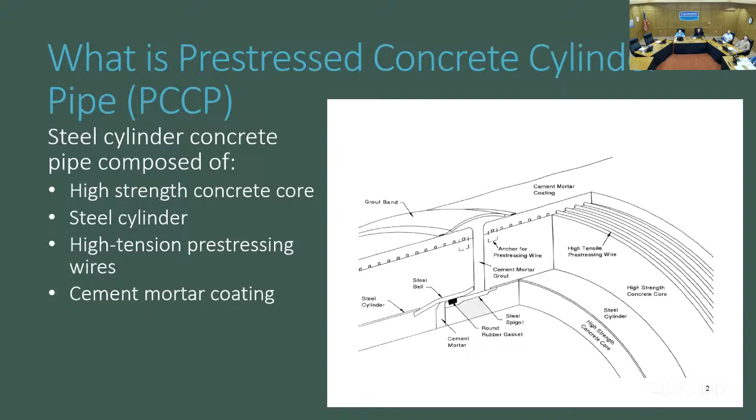So why do we do a condition assessment? Well, PCCP, unfortunately, is susceptible to catastrophic failures. The pre-stressing wires tend to corrode and fail, and one contributor to that is hydrogen embrittlement of the wires, which is a common cause of failure in PCCP. So performing condition assessment helps us identify pipe sections with potential structural deficiencies, and allows us to track and plan for rehab of pipelines that may become structurally deficient.

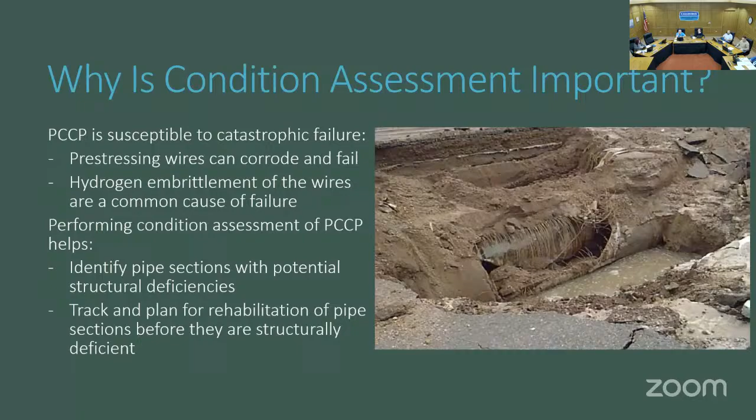Sorry, skipped over — we unfortunately suffered a big event years ago where we had a catastrophic failure of one of our PCCP pipelines. This is a video from March 30th, 1997 that I'd like to play for you all.

Simi Valley residents are back in their homes now after a ruptured water main forced them to evacuate, but repair crews continue to work around the clock to repair the damage. That's Madera and Royal River, yeah, from my house. In Simi Valley, it was just before 5 o'clock Saturday when a water main burst, forcing a flood of water to pour into the street. My wife heard it — she said it sounded like a pop, like a loud light bulb going off. And she heard screaming from across the street. Across the street is a shopping center, which was filled with people at the time the pipe burst. Suddenly they were cut off by water gushing out at 20,000 gallons per minute. A half-mile stretch of Madera Road was quickly flooded, and with the water rapidly rising, nearby residents were told to evacuate.

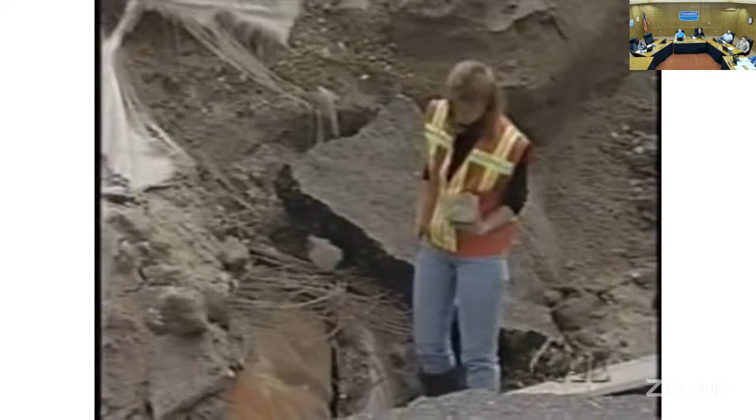Raging torrent. It was like raging. Crews have been working nonstop to repair the damage. Now that the water has receded, you can get an idea of the immense force the water carried. Huge chunks of asphalt were ripped from the street and thrown to the sidewalk.

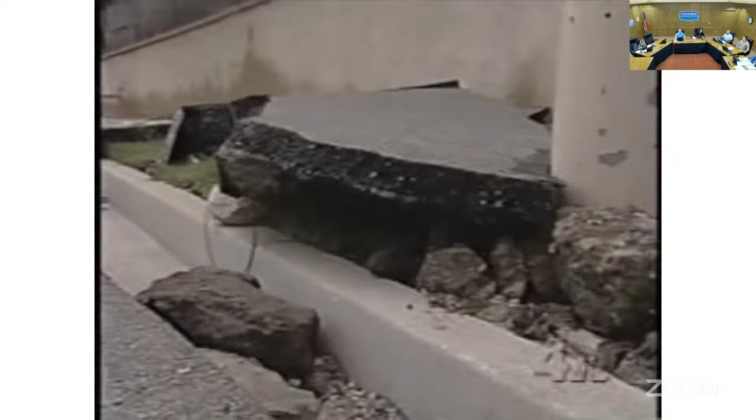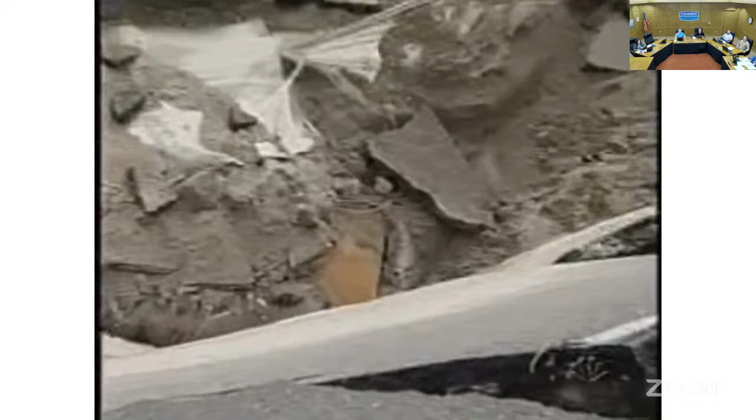The problem started a few days ago when a contractor working on the nearby Wood Ranch development cracked the water main. The valve under Madera Road was closed for repairs. A power outage on Saturday created a giant pressure surge. When the water hit that closed valve, it couldn't contain the pressure.

Some of that last part isn't entirely accurate, but that's okay. That video did show the pre-stressing wires, the steel can, and a lot of concrete just everywhere. Unfortunately, PCCP tends to fail catastrophically, very different from the typical failure modes of welded steel pipe. That's why we like welded steel pipe much more.

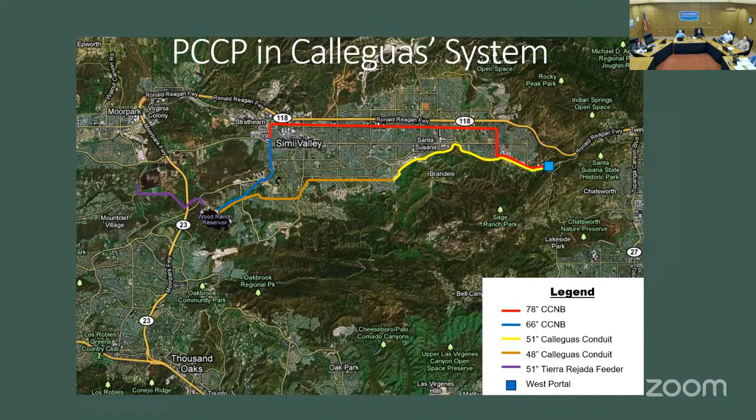This next slide shows the amount of our system that's composed of PCCP. The lines shown in red and blue represent the Calleguas Conduit North Branch, and the lines in yellow and orange are our South Branch, 51-inch diameter, and our North Branch is 78 to 66-inch diameter. There's also a purple line representing the Tierra Rejada feeder, and collectively that is a total of 26 miles of pipeline in our system.

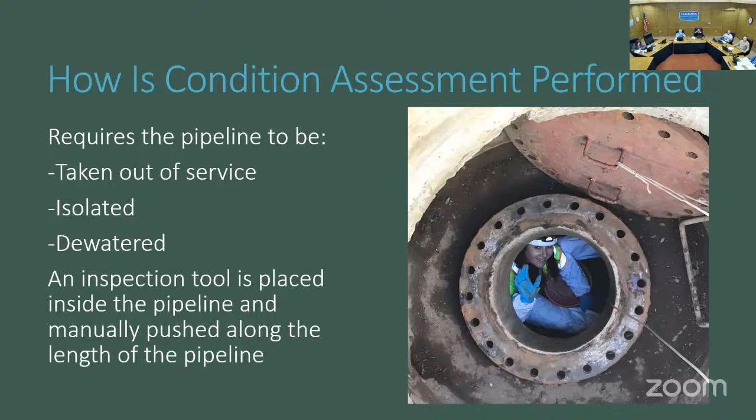And we insert the inspection tool that does the inspection, looking for wire breaks specifically. Here's a photo showing that instrument. It's evolved over the years. Basically, this tool produces an electric field that creates an electric current in the pre-stressing wire. The second coil detects the electric field produced by the wires, and a break in the wire creates a disruption. That's how we know there's a break, because we identify and detect that interruption in the field.

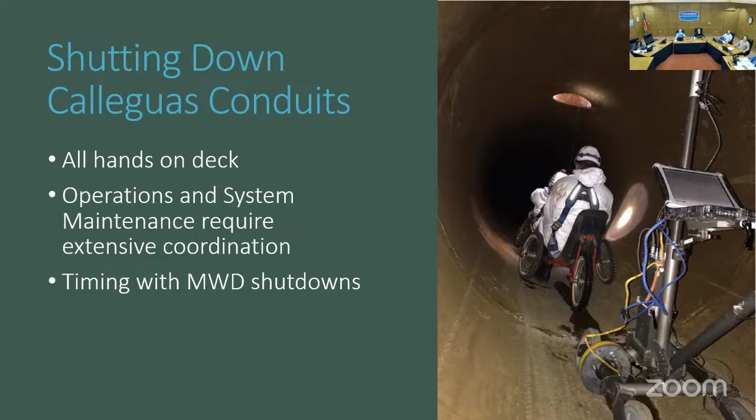So shutting down Calleguas Conduit, let's talk about what happens actually during that inspection. Of course, it requires all hands on deck. O&M engineering is certainly involved in this. Our operations and system maintenance requires extensive coordination ahead of the shutdown and the entry into the pipeline. We also coordinate very closely with Metropolitan Water District's shutdowns, so we can take advantage of that period when we're not going to get imported water supplies into our system.

And with that, I'll hand it over to Julio. Thanks, for the next steps.

Before I get started, about two weeks ago, Ian sent an email to all the supervisors with a list of bulleted item questions. One of them was, what keeps you and your staff awake at night? And I think I can say now, line breaks keep me awake at night.

So let's talk about how the operations division prepares for Lake Bard Water Filtration Plant and Las Posas wellfield production. Where's page down? Oh, here it is. Thank you. Okay, okay.

So we're going to start with Lake Bard Water Filtration Plant. We have to go all the way to the source, which is Lake Bard. At the source, we need to determine what the water quality is. I've got about three or four items here that are very particular that we need to know about in the operations division to understand what would optimize performance at the treatment plant.

One of them is oxygen. We need to know whether or not the water is anoxic, which is low in oxygen, because this could cause the water to smell like hydrogen sulfide, which smells like rotten eggs. If you have a hot water heater, some of you may have opened up that drain and it has that foul smell - that's hydrogen sulfide, the rotten egg smell, which is obviously undesirable.

Other things that we look at are elevated algae concentrations. We need to determine whether or not the amount of algae that occurs naturally in the lake is elevated. If it's elevated, it's going to affect the filter performance because the algae sits at the surface of the filters, and the filters are designed for particulate matter to penetrate into the filter bed.

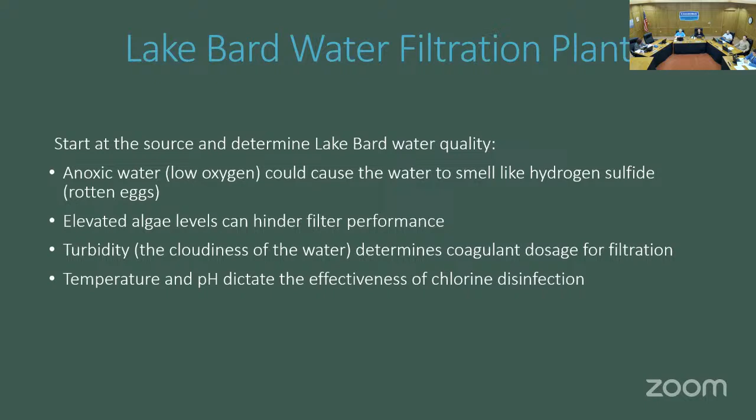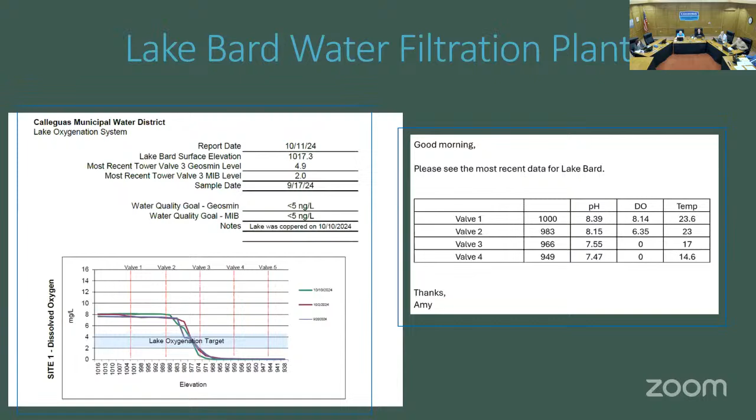So this is a total indication that the lake is thermally stratified, and we have the ability to draw from those valves. That information is very helpful to let us know that where the valves have 0 oxygen, it could be a challenge to treat that water. On the right-hand side, we have valves 1, 2, 3, and 4, and a table here - let's jump to dissolved oxygen. You can see at the higher levels, valve 1 is at 8.14, valve 2 is at 6.35, but it drops dramatically at valves 3 and 4. This is very good information to help us understand the water quality at the lake before we start the Lake Bard water filtration plant.

Once we understand the water quality at Lake Bard, we put the Lake Bard water filtration plant in recirculation mode. Lake water is recirculated through the filtration plant and back to Lake Bard to displace any water that's been sitting within the treatment plant system. During recirculation mode, ancillary equipment is exercised and tested to ensure it's reliable during production.

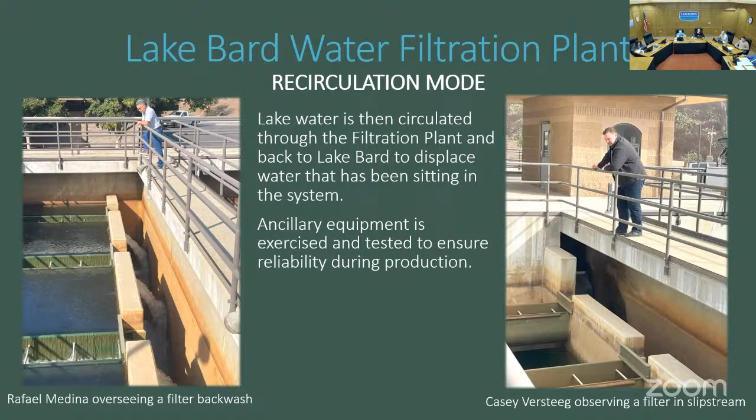To the left is one of our operators, Rafael Medina, overseeing a filter backwash. You can notice the water flowing out of the green troughs and into the gullet - this is when we're washing it, and the flow basically travels backwards. On the right is Casey Versteeg, overseeing a filter in slipstream mode, which is just another term for bypass. The slipstream mode is the mode we're using when we're in recirculation mode.

Operations could not do this alone - we most definitely need support from the other O&M groups. Juan Zavalza is with the distribution system group, and he's replacing a diaphragm on a solenoid valve. This solenoid valve receives cooling water, which is injected into the sludge pump. To the right we have Patrick Augusta, working on a positive displacement pump for one of our filter aid systems. The filter aid chemical helps improve the coagulant dose, so that's really important.

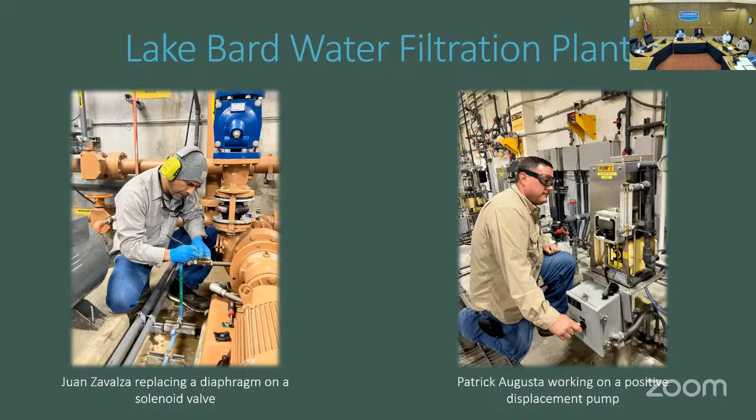After chemical doses have been adjusted, filters backwashed and preconditioned and performance tested, and plant performance is all dialed in, treated water is redirected from recirculation mode into the clear wells and then into the distribution system. Off to the right we have two operators, Eddie Russell and David Hernandez, opening up those clear well valves and preparing for a backwash supply. The clear well is right on the other side of Eddie Russell. The water flow during backwash is from the clear wells through these valves, which are isolated closed - they're going to open them up to a backwash pump and into the filters.

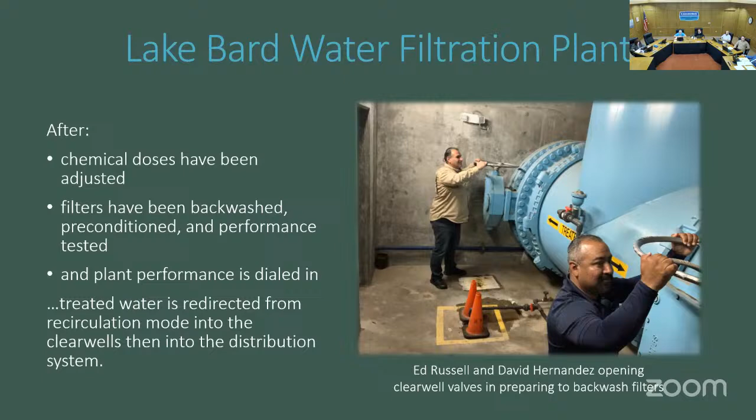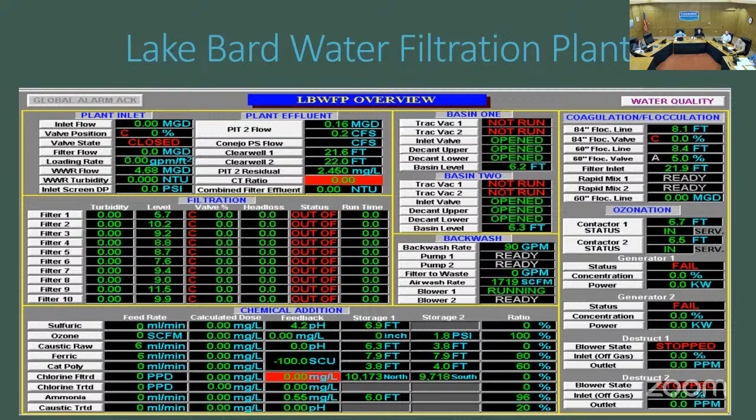Okay, on to the Las Posas well field. Water extracted from the wells at well field 1 and 2 can be high in iron and manganese. Therefore, pre-injected MWD water pushes a plume of higher-quality water that reduces the amount of iron and manganese that can be oxidized by chlorine and precipitate into the water, causing undesirable color during extraction. Also, injection helps reduce the chlorine demand during disinfection.

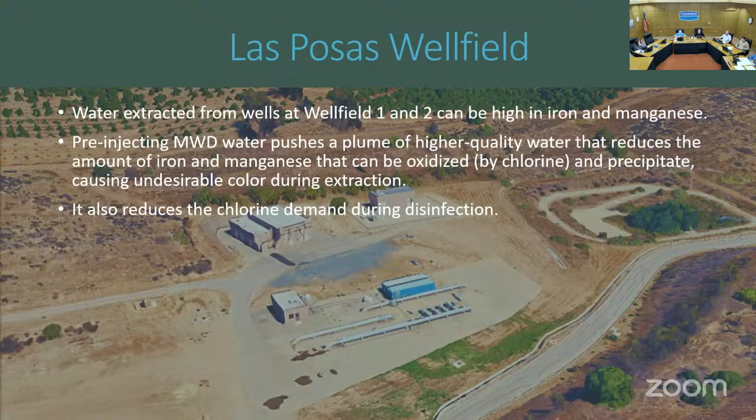So we need to make sure that we bank enough MWD water into the ground to last for the duration of the outage. Something we need to be considerate of is that most wells, when injecting, only inject at a rate of 1.5 CFS cubic feet per second, yet during extraction they produce at a rate of 3 CFS. So it takes longer to inject water at the same quantity than it takes to turn around and extract it. The longer we extract, the likelier the iron and manganese concentrations are to increase. That's why it's really important in operations to make sure we bank enough water before we turn around and extract it.

This is Jose Tamayo. He's configuring the local control panel on well 7 for flush. And here he is again to the right, taking a look into the air gap, just checking the color.

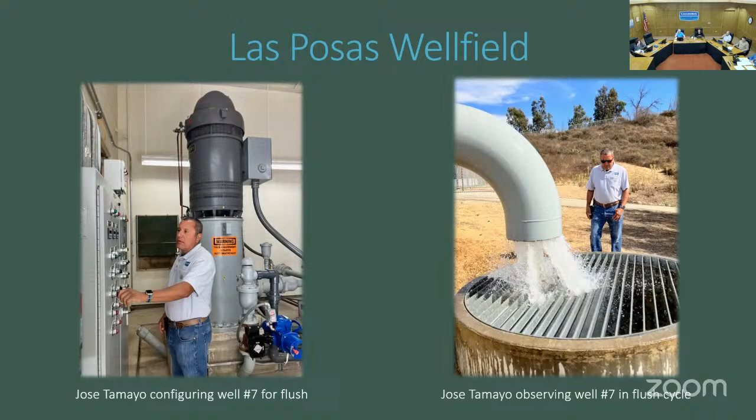And that's it. I'm going to hand it off to Matt.

All right, with that, pipeline entries keep me up at night. You'll see why. So for system maintenance purposes, and particularly for this pipeline entry coming up next year, we do confined space training at a rescue facility at wellfield number 1 before all shutdowns. That's the picture to the left. To the right, that's Pepe Cervantes actually entering the 78-inch pipe, the last time we did this pipeline inspection.

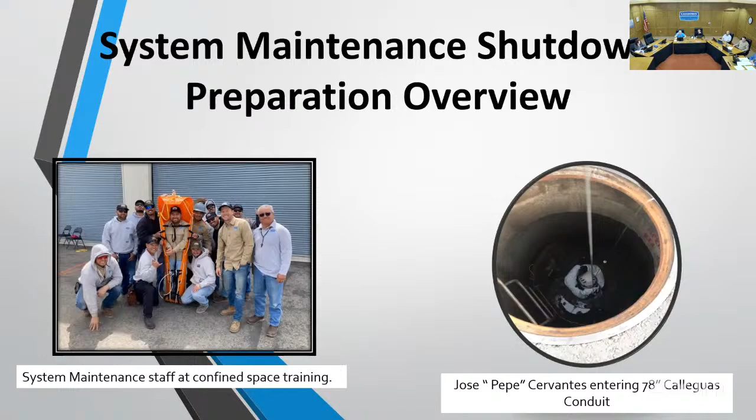As you can see to the right, North Branch Unit 1 starts at West Portal and then goes to Donkey Hill, which is Yosemite and Catherine. So that would be from one line valve to another. Doesn't look like it, but that's about 2.3 miles worth of 78-inch pipeline.

Donkey Hill is an important geographic place name in Calleguas, but it has no official standing elsewhere. Apparently someone once saw a donkey on the hill, and it's therefore been known since as Donkey Hill. It's a big landmark for us, but if you tell your friends you're going to Donkey Hill, they'll have no idea what you're talking about. We could ask the city to make that official. We certainly could, that'd be great. You know how excited people would be here. It's super hard to explain to the new guys why we call it Donkey Hill.

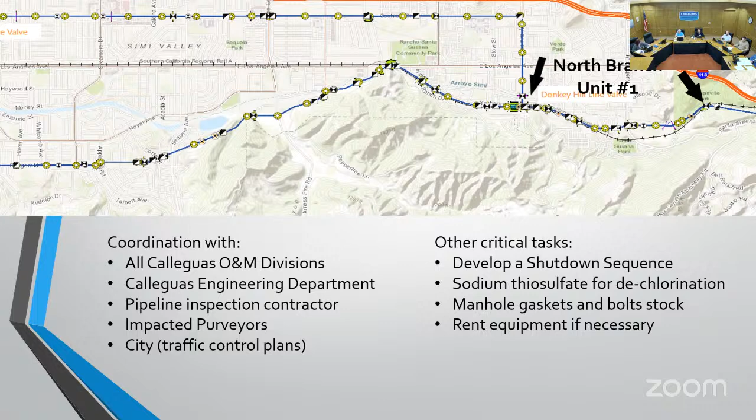Our preparation for this particular shutdown will be about 4 months. We coordinate with all Calleguas O&M divisions, engineering department, pipeline inspection contractor. We touch base with the impacted purveyors, and we have to submit traffic control to the cities. Some other critical tasks include developing a shutdown sequence, checking stock of sodium thiosulfate which is used for dechlorination purposes, checking all manhole gaskets and bolt stock because we switch those out every time we take them off, and arranging rental equipment, as little as a restroom if necessary for the shutdowns.

So we start out with isolation. Isolation could be from anywhere from 2 to 5 main feeder valves. We prefer to double isolate as a safety precaution when we can. And operations, which is the Calleguas control room, must be called before we touch any isolation valve to open or close it.

The picture to the left is David Vaca. He's isolating a 24-inch interconnect valve. The middle picture is Hector Aguilera isolating the 78-inch valve near West Portal. Hector is actually standing on the 78-inch pipe in the far right picture to reach that valve. That takes about 30 to 35 minutes to close, and that's going nice and slow. And that's just one of the valves.

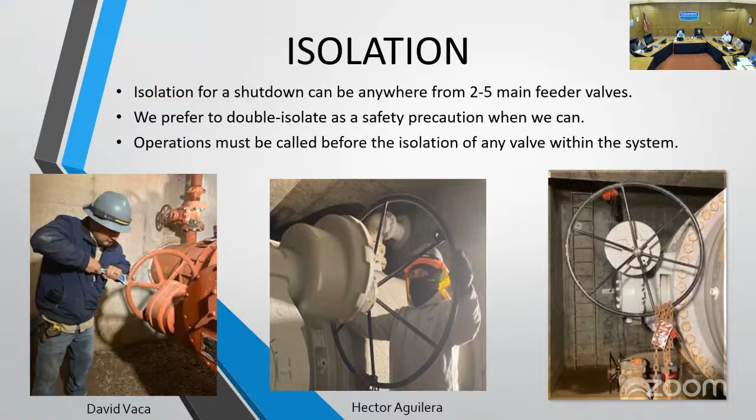Once we isolate our valves, we start the dewatering process. In the upper left-hand corner, that's an 8-inch plug valve, which we mainly use to dewater the pipelines for shutdowns. This particular shutdown, we have 4 blow-offs that we're going to be using to dewater. Total gallons for this is 3.1 million gallons, and it'll probably take us about 3 days to dewater this whole pipeline.

Certain sections are connected to storm drains, and certain sections we have to run temporary piping just to get the water away from the job site. So it could be anywhere from 40 to 60 feet of temporary piping. We try to go to V ditches, or we have to let it go down the road to the nearest storm drain. The bottom left-hand corner next to the orange bucket is sodium thiosulfate, which we set up as a drip system to dechlorinate the water.

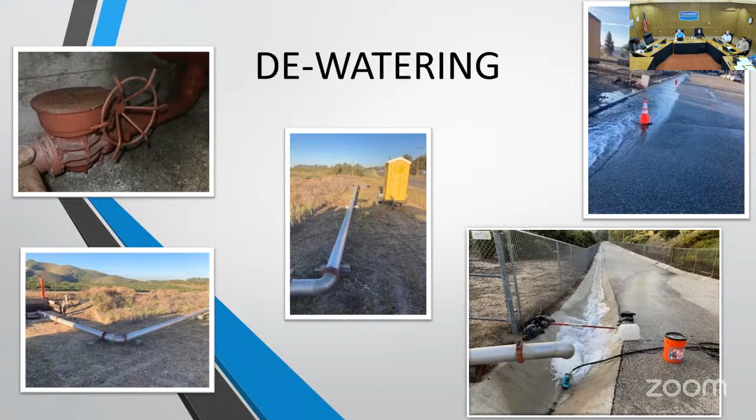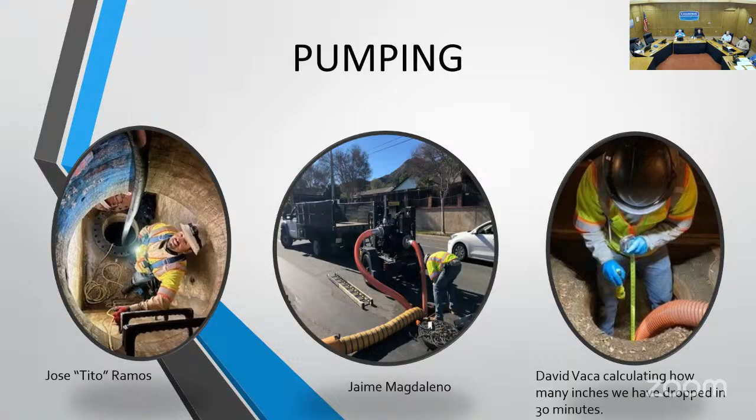We found out in previous inspections that it's always best to walk into the wind instead of exhausting and walking in, as we have contractors working above ground or even vehicles passing in Simi Valley at traffic stops where their exhaust is going straight into the fan. So they're at a stoplight, the exhaust is going into the fan, and all we're doing is pumping that in. We found it's best to always walk towards it so we can exhaust it quickly.

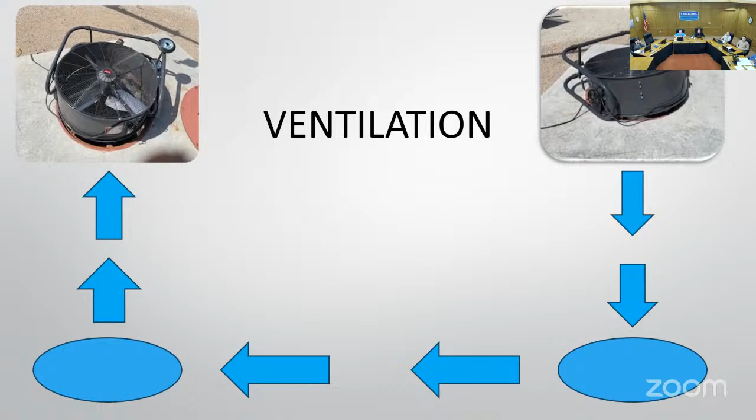Then we do a pipeline pre-inspection. As you guys know, plans aren't always perfect, so there are bellies that we can't get to from the manholes or the pump wells. During our pre-inspection, we came up to at least 2 feet of water, about 300 feet long, where we have to get the water out. The only way we can get the water out is to physically go in the pipe and drag pumps down as far as we can into that belly.

Sometimes we run 2-inch or 4-inch submersible pumps, and then we run the hoses 200 to 300 feet to the nearest manhole and extract it above grade. Those take some time, and we always run into those during each pipeline inspection—that's why we do pre-inspection.

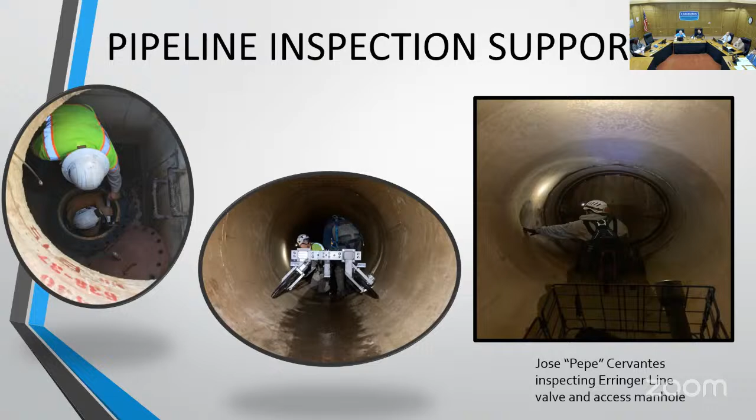The picture in the middle is Xylem setting up their equipment in the 78-inch pipe. To the right is Pepe and Jared at the Erringer line valve. Pepe is doing a visual inspection on the access manhole, and right in front of him is the Erringer line valve, which is fully pressurized on the other side. As you can see, there's no leakage on that one, so we feel comfortable just doing single isolation on that side.

So after the contractor's inspection is completed, we get to go back and work in reverse. We install all manholes, close all blow-offs, install pump well big caps, and assign staff to air and vacuum valves to monitor air while we recharge. Then we can begin recharging.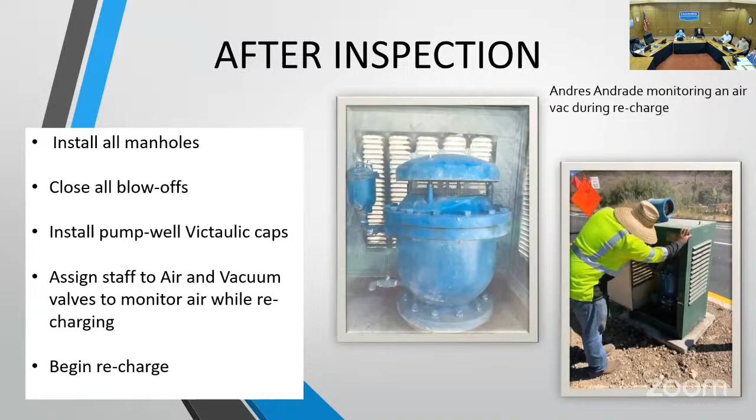We're always just putting our hand over the flow and monitoring. If it's going too drastic, we shut down the valve a little bit. Air is our friend, but air could also be our enemy.

We've got 3.1 million gallons to recharge, so it's going to take quite some time - probably about 2 days, running 24-hour shifts. We'll go day and night, running about 2,000 gallons per minute, with separate shifts running and monitoring everything to make sure we're not spilling anywhere, and that all manholes, blow-offs, and pump well caps were put back on properly.

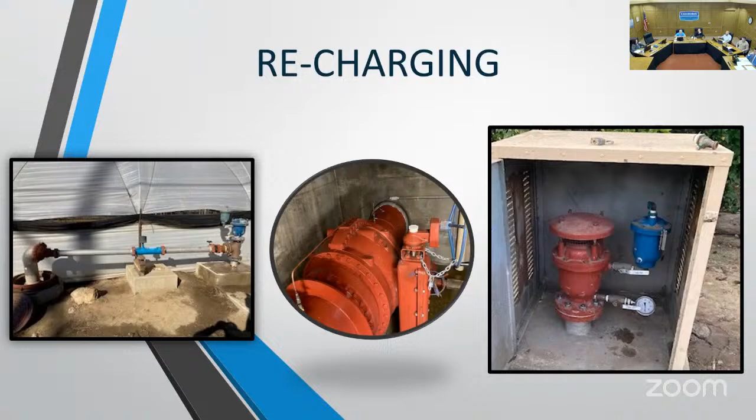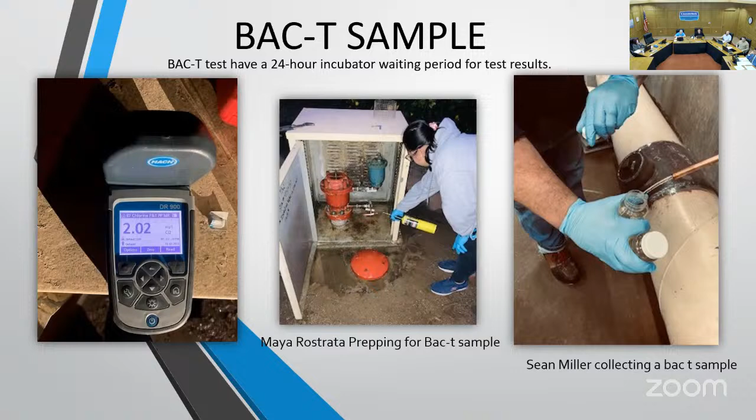After we get the line fully recharged, we flush for the bac-T, take the sample, and have to wait 24 hours until we can put the line back into service. That's a whole other day we have to wait during the process.

And that's Sean Crane saying that's a wrap - that's the final steps after the 24-hour waiting period. Operations and system maintenance staff coordinate to unisolate all valves, then resume normal operation of the distribution system, and notify all impacted purveyors so they can resume normal operation as well.

So this particular shutdown involved a 78-inch pipeline, 2.3 miles or 12,500 feet, which is roughly about 3.1 million gallons. It's 2 weeks worth of work, hopefully 1 day worth of inspection by the contractor, and we run 24 hours for recharge. We'll hand it back to you.

Do you get a lot of phone calls on the discharge evacuated? Yes, we do. We actually started labeling all our sodium thiosulfate jugs with Calleguas MWD, putting our phone number to the control room.

Once Matt's group, system maintenance, is completely done and everything's back to normal operations, and we've waited 24 hours on the bac-T, we can now transition off the Calleguas local resources - the Lake Bard Water Filtration Plant and the Las Posas well field - back onto metropolitan water deliveries.

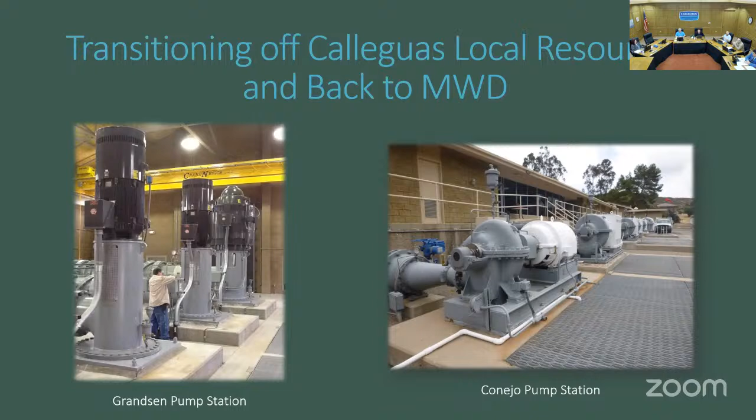The way we transition onto MWD off of the Calleguas local resources is we'll start by taking a look at pressures on the east end of the distribution system. We have two standpipes, which we call the east portal. One is connected to the north conduit and the other is connected to the south conduit. We're coordinating with Eagle Rock, which is the MWD operations center.

For example, I'll either go 20 CFS or 10 CFS increments, so they will start delivering that water to us. I'm looking for indications that we've received the water, that it's come down the tunnel and that it's at the base of the tunnel into the distribution system, using the pressure gauges on that side of the distribution system, as well as those portals. As the portal levels are going up, that's telling me that we have the water.

So then I will decrease either from the Las Posas well field or the Lake Bard Water Filtration Plant at the same increment, and I'll keep repeating that cycle until all of the local resources at Calleguas are at zero, and all of the deliveries are now coming in from MWD, which is back to normal operations.

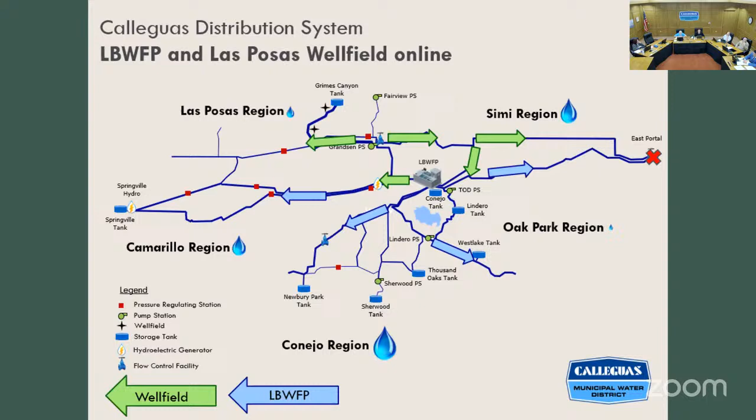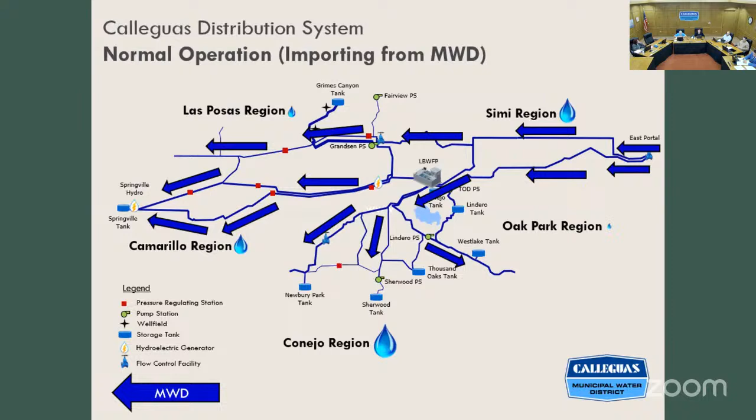So what happens after the inspection is done? There's a lot of work that goes into planning and implementing the actual inspection, and then we wait for the consultant to submit the report on their findings.

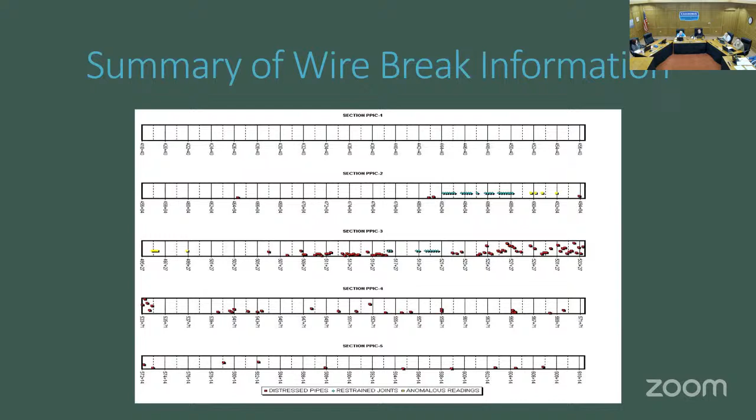This table that I'm showing is a summary of the wire break information that may be submitted as part of that report. All those red dots indicate where a distressed pipe was identified, a wire break was identified in this example. There's also indications where we have restrained joints, also detected by the tool. But those distress locations are what we need to identify and keep an eye on.

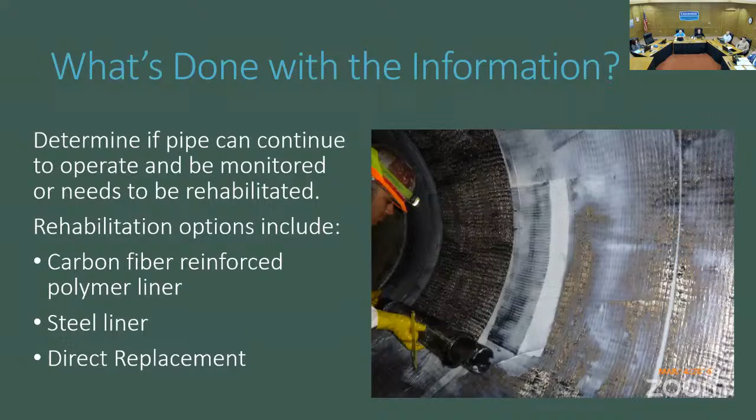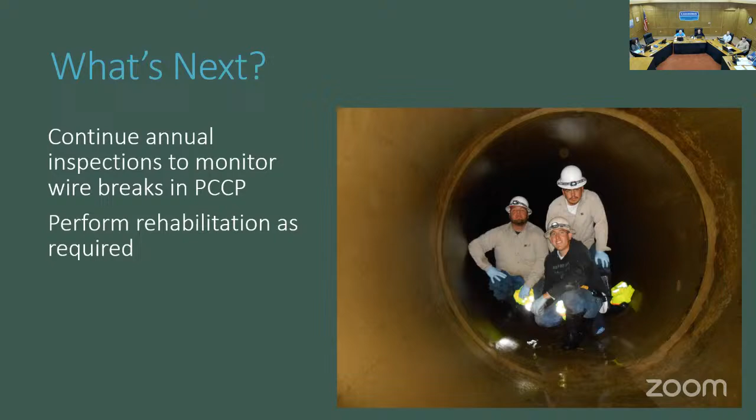So what's next? We'll continue to perform annual inspections to monitor those wire breaks in our PCCP pipeline and perform rehabilitation as needed. And that concludes our presentation tonight, and we're happy to take questions.

I did have one about the carbon fiber repair. So with the pre-stressed concrete, it seems we have a decent ability to analyze point defects and how they correlate to the strength. With the up-armored carbon fiber ones, does that affect our ability to inspect and gauge strength?

So once we rehab a pipe section with carbon fiber, we're no longer relying on the host pipe. So that section of PCCP that's been rehabbed is no longer of concern regarding how many wire breaks it has, because that carbon fiber lining is structurally independent and does not depend on the structural capacity of the host pipe. So it would not matter to us.

Right, and so the carbon fiber though, how do we inspect that? Great question. With carbon fiber, we're not looking for wire breaks. That's just a visual inspection to see if there's any delamination. So you can see it, you can walk in and see. I don't have a photo of how it looks, but you can actually see the resin.

We've gone in and seen them 20 years after they went in. They look like they were installed yesterday. Yeah, it's pretty amazing actually how well they persist.

Thank you. So, speaking of, is there a time component, given the frequency that you take a look at this? You do it every 5 years, but you also do some pipe break assessments annually? And the performance curves? Yeah, so how would you derive that? The performance curves are actually something we're just doing for the first time. We had not done the performance curves before.

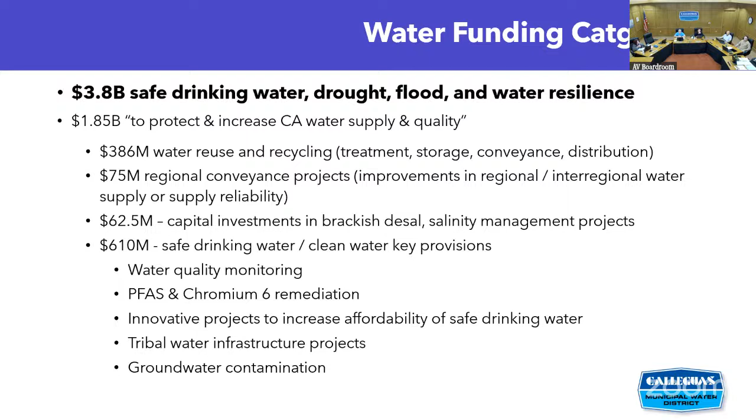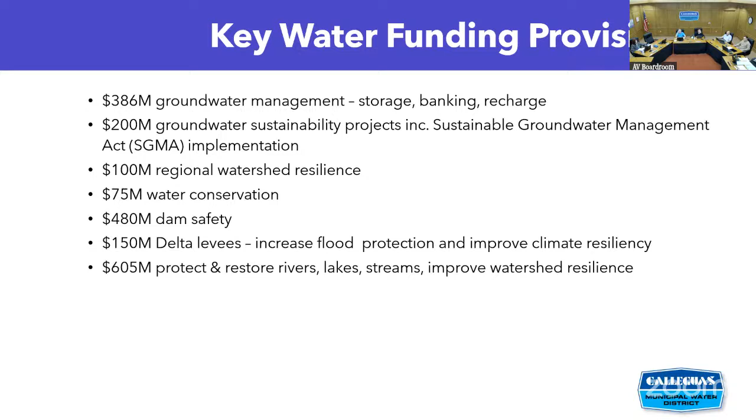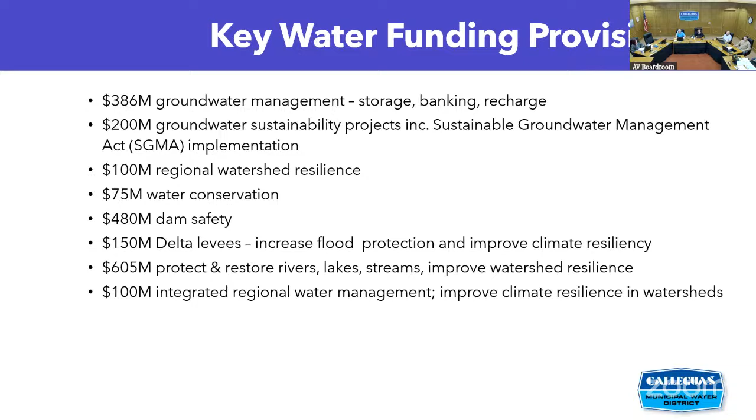The second slide is for groundwater management programs: $386 million for storage, banking, recharge, and compliance with the Sustainable Groundwater Management Act. There is $100 million allocated for regional watershed resilience, 75 million for water conservation in agricultural and urban areas, about $500 million for dam safety, 150 million for delta levees to increase flood protection and improve climate resilience, and 700+ million for protecting and restoring rivers, lakes, streams, integrated regional water management, and improving climate resilience in watersheds. So those are the highlights of the water related categories.

I just want to review for you the 7 other categories in this bond. One, the second highest funded, is wildfire and forest resilience at $1.5 billion. I pulled out 2 bullet points in that category because I thought they would be of interest to you, since they deal with water related issues. One is for watershed restoration and improvement.

Also in the bond are coastal resilience funds, extreme heat mitigation funds of $500 million, protecting biodiversity, accelerating nature-based climate solutions, funds for farms, ranches, and working lands of $300 million, money for parks creation, money for clean air, and about half of that is allocated for offshore wind development. I can go into more detail on each of these if you want, but I'm going to move ahead and we can come back if needed.

It's noteworthy that 40% of the funding must go to vulnerable populations or disadvantaged communities. What does that mean? Vulnerable populations are a subgroup of a population within a region or community that face a disproportionately heightened risk or increased sensitivity to the impacts of climate change and lack adequate resources to cope with those. A disadvantaged community is the existing definition in statute—a community with a median household income of 80% or less of the area average.

All right, we'll cue this up. I'm going to apologize, I'm at the tail end of a head cold, so if you see me sniffling and weeping, it's not for the sheer beauty of the analysis. Although I don't think you'll be disappointed.

So yes, it's been a few months since our last partner workshop, and that's a few months since we last updated the board. We had a partner workshop in the very beginning of this month, and the report out from that will be in the monthly status report next month, so you can get a little bit more detail or take a crack at it.

But we're going to go through, starting with a quick reminder of where this all came from.

Really, the August 2023 strategic plan that your board adopted had as its vision statement this new model for resilience. And from the beginning, we really knew that this process was going to be an iterative approach, that the solution would be made up not just of several projects, but several different kinds of projects that would really bring in water at different places and over different times. And that would require programs and frameworks and institutional arrangements that didn't yet exist, and that would require the input of many people. It wasn't going to be just one thing that was going to fix our problem.

And this really has been genuinely exploratory. It's not that we didn't know anything heading into it, of course, but we have found out things I don't think we were even anticipating.

And that all happened because, as it says on this slide, we built on a history of extensive regional collaboration. As you know, we didn't just stick with the 19 purveyors in the Calleguas service area, but we included regional partners: Las Virgenes, United, Water Conservation District, Casitas, the City of Ventura, and Santa Clarita Valley Water.

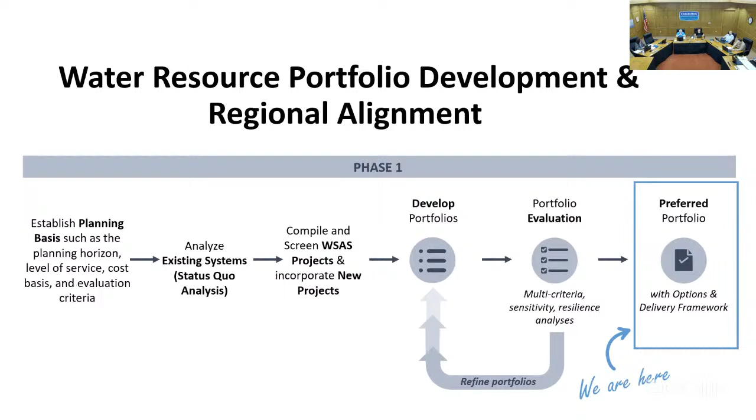And after all that, here we are at the preferred portfolio. This doesn't mean that we've decided exactly which projects to build and we're ready to go out to bid. Note that in that rectangle at the end, options. What this means is that there's broad consensus amongst all of the participants, based on the methodology I'm going to step through in a few minutes and the analysis that Christine's going to go over, that a certain constellation of projects and programs seems to be able to meet the region's needs in terms of cost and reliability versus the status quo.

So what do we mean really by the status quo? It doesn't really mean doing nothing. It means doing nothing more than what we've already planned.

Some of the planned projects here in the status quo include the Las Virgenes Triunfo JPA Pure Water Project, to the tune of about 1,000 acre-feet a year. There's maybe additional options to expand that as the project goes into additional phases and ramps up production.

The Metropolitan Drought Action Projects reduce the impacts of another 2022 on the west side, the State Water Project dependent area. That's some of the operational changes they're making on the east side, including options to bring water up from the central pool along the Sepulveda, and a handful of those drought action projects.

Pure water is included. The interconnections we're doing in Las Virgenes and Ventura, the Crestview well and the Fairview well for additional water during outages, and the pump station that we are planning to build at Lake Bard to utilize the full 10,000 acre-feet a year that is stored up there.

Not included is the $20 billion cost for the Delta Conveyance project. But that's also not included. The additional reliability of the Delta Conveyance is also not included in the assumptions made in the status quo.

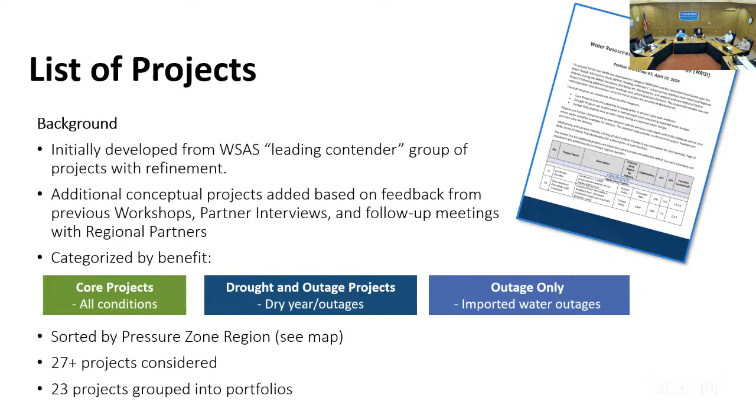Considering participation in the South Oxnard Plain Brackish Water Treatment Plant, a variation of Oxnard or United Water Conservation's EBB program. Doing in-lieu storage in Lake Casitas, and doing aquifer storage and recovery in the Santa Paula Basin up to the Santa Clara River Valley a little bit.

So those are some of the borderland projects outside of our service area, all the way up to potentially including external groundwater banking in Kern or Semitropic in the San Joaquin Valley, in addition to a number of projects we would partner potentially with our retailers on inside the service area. So this is just to give you a scope, the geographic diversity of some of the projects that we've been looking at.

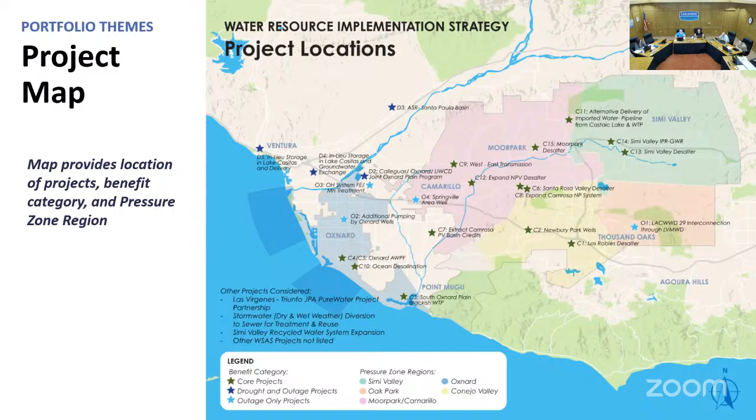So we looked at risk and uncertainty, not just from the standard perspectives about how long it will take, how much yield might be reduced by various impacts. Is the groundwater going to be there? Is the basin going to yield what we think it's going to yield? Is it going to rain to get water in those storage basins as much as we thought? And then how much the cost might be affected by those things.

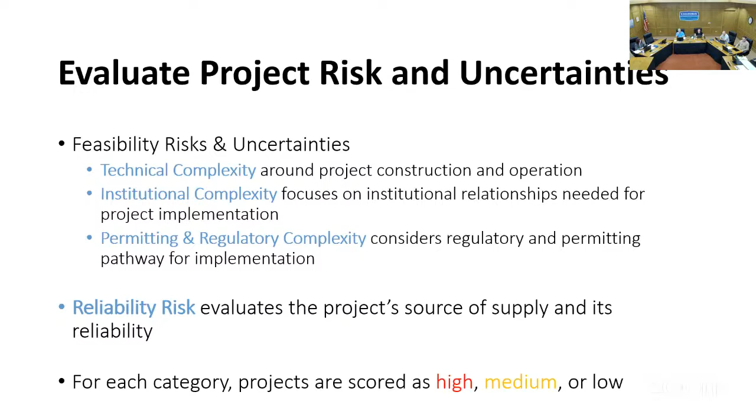But we also looked at some of these other risks and uncertainties, like technical complexity, institutional complexity, how difficult is the permitting, how difficult are the partners we may have to work with, some of the frameworks we'd have to develop within the groundwater, the GMA for instance. Each of those projects received a risk ranking across these four complexity categories, and at the end, a total risk score, which we categorized into a hopefully relatively intuitive red, yellow, and green scheme.

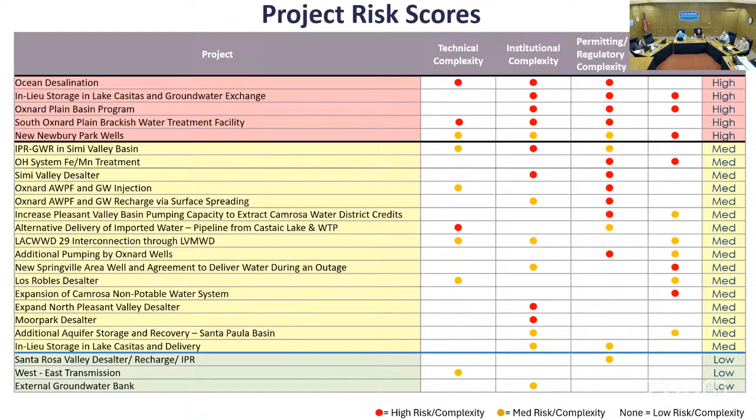And then what we did, we took these projects and assembled them into various portfolios and did the analysis again.

We looked at these things based on which retailer partners were involved, pressure zones, that's where the water comes into the system. And then on an aggregate basis, to what extent does this impact district-wide demands, including delivery constraints?

And then each of those portfolios we compared to the status quo. And we ran all these against the 96 imported water supply projections provided by Metropolitan Water District that they used in their integrated resource planning that is ongoing down there.

The demand envelope, so anticipated demands over the planning period, kind of bracketed by retail urban water management plans, many of which still assume increasing demands over the planning period. The 2020 urban water management plans, those planning periods go through 2040, optionally 2045. Calleguas's urban water management plan has been flat.

And then the urban water use objectives stemming from the Making Conservation a California Way of Life legislation in 2018 demonstrate decreasing demand across our service area, because Oxnard is going to be able to meet these urban water use objectives, at least for the first few increments of time.

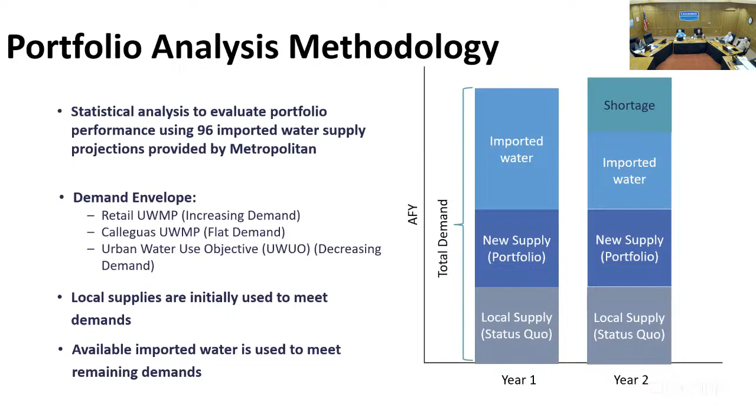So now under the status quo, we meet that shortage with conservation. And one of the things that we did was evaluate the frequency and magnitude of these shortages over time. And really the question then becomes, how much are you willing to live without, and how often are you willing to live without that amount of water?

And really that top shortage bucket is what got us into this mess in the first place, right? That shortage, that bucket was too big and it happened too often and there was too much pain.

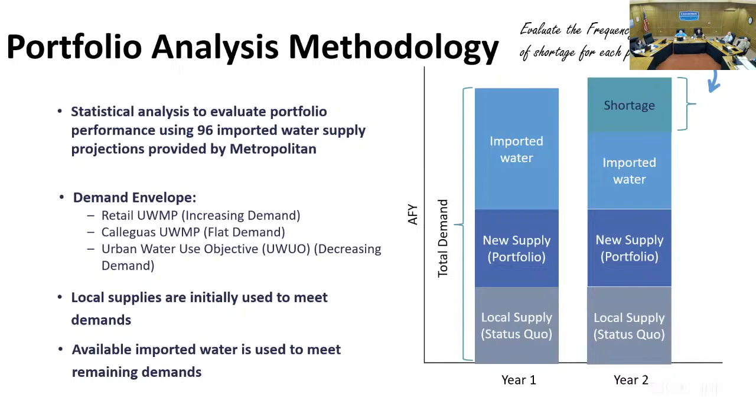So if you remember the reduced reliability and increasing cone of cost graphs that I showed a few slides ago, we did that with portfolios. So we evaluated how risks and uncertainties affect cost and reliability. Each portfolio has its own reliability and cost projection graphs.

More of that will be available to you upon request, but there were too many graphs to go through today. And then we did that for each of the portfolios. We applied a handful of evaluative criteria, and then we took the winners from each of those and created hybrid portfolios, and ran those again.

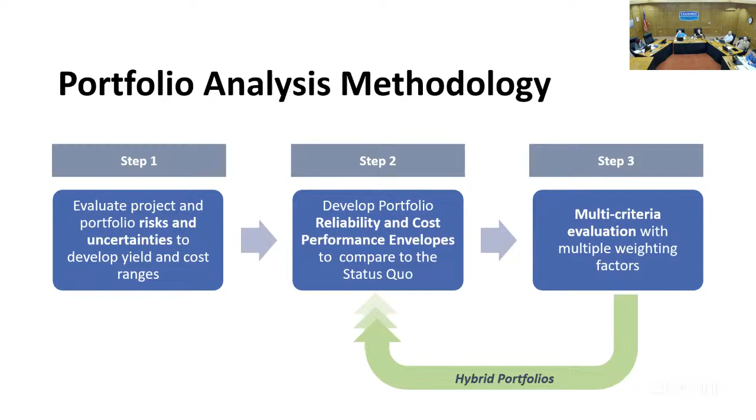So when I talk about evaluative criteria, I'm talking about things like life cycle cost, capacity cost, reliability, resilience, and adaptability. And adaptability was very important to us and to our regional partners involved in this.

It's like, do we bring the entire project online and then we're stuck with that thing? Is it something that can be phased? Is it something that can ramp up and down depending on climatic conditions, supply conditions?

So really, we did this again and again. We ran these through the projects. We ran the projects through these. We ran the portfolios through these. We developed hybrid portfolios around that through here.

It's kind of like gold refinement, right? You pass it through smelting, and then you do electrolysis, then you do chemical treatment. You get closer and closer to pure product. The idea is to have a 24-karat portfolio, which is what Christine is going to describe.

All right, yeah, let's move on to the portfolio analysis.

The first thing done in analyzing the portfolios was to group the projects into themes. The portfolios were developed around 6 initial themes: lowest cost, local supply and control, imported water system optimization, reliability and resilience, adaptability emphasis, and groundwater sustainability and recycled water emphasis.

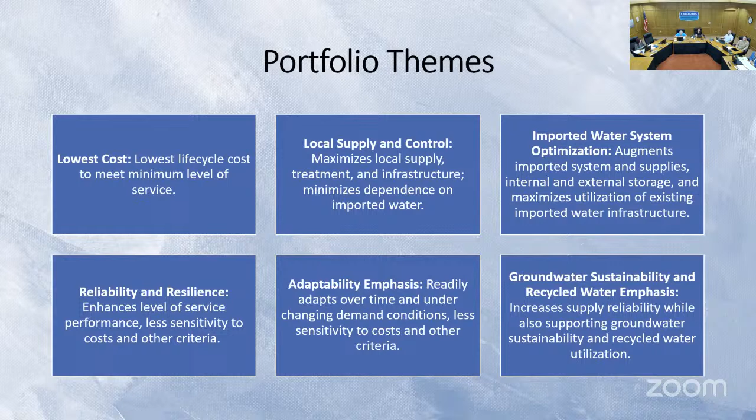The initial analysis of these 6 portfolios taught us that investment in local water supply projects provides greater reliability at a lower long-term cost relative to the status quo, while significantly reducing demand for imported water. These investments also provide reliability and resilience, but because of how our distribution system is configured and our limited ability to move water from west to east, we'd need extensive infrastructure improvements to utilize those supplies, since most opportunities for water resource development are on the plain while most demand is in the upper zone. We can move water well from east to west, but not at all from west to east.

We looked at some drought storage projects, and those increase reliability, but they have high costs from a life cycle perspective. That's because you're purchasing imported water, storing it, and then not using it very often, so you're not distributing those capital costs over a large volume of water.

Local projects can be adaptively phased to incrementally increase reliability while moderating cost impacts. We're talking about potentially significant capital investments here, and the ability to do that incrementally and adapt as you move forward makes it more cost effective and reduces rate shock.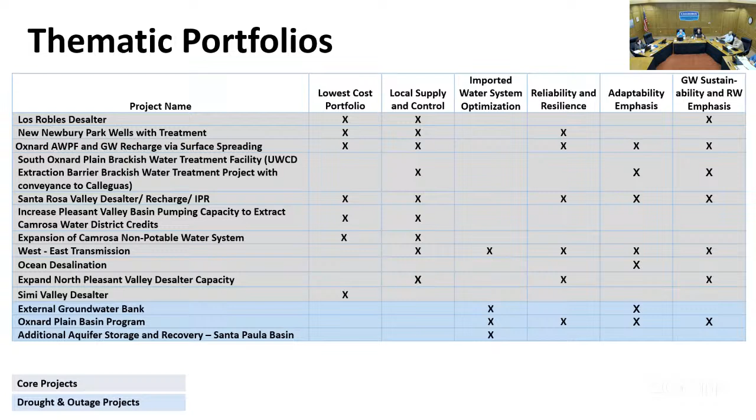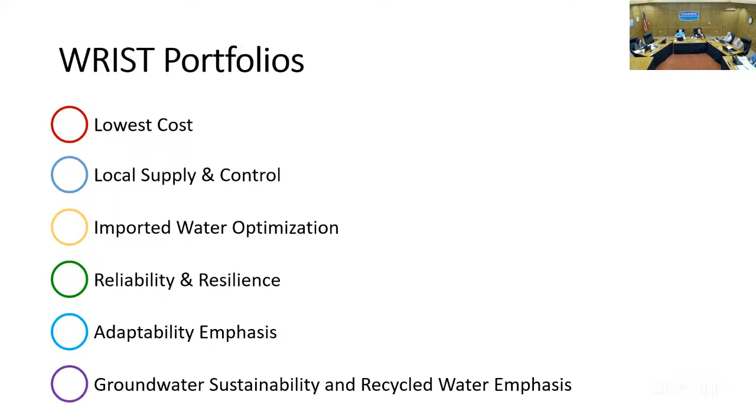From there, we went to hybrid portfolios. Here's our 6 themes along the left-hand side. We looked at different permutations of putting them together and came up with 4 hybrid portfolios. The goal was to take each portfolio and address its weakness by adding projects that addressed that weakness.

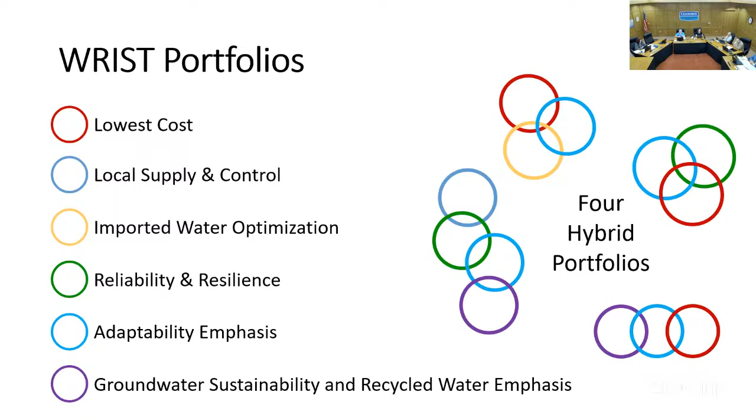For example, with the adaptability emphasis portfolio, which was pricier, we added projects that would reduce portfolio costs. For reliability and resilience, we wanted to increase the adaptability. And for lowest cost, we wanted to address reliability, resilience, and adaptability.

So we ended up with these 4 hybrid portfolios. We basically took the adaptability portfolio and added some lower cost projects. We took the reliability and resilience portfolio, with 2 variations to increase adaptability - one on a local project basis, the other on a regional basis.

This hybrid 4, the lowest cost portfolio, not surprisingly scored very well in the cost criterion by adding west to east transmission, which would allow us to move water from west to east. That improves the reliability, resilience, and adaptability of that particular hybrid.

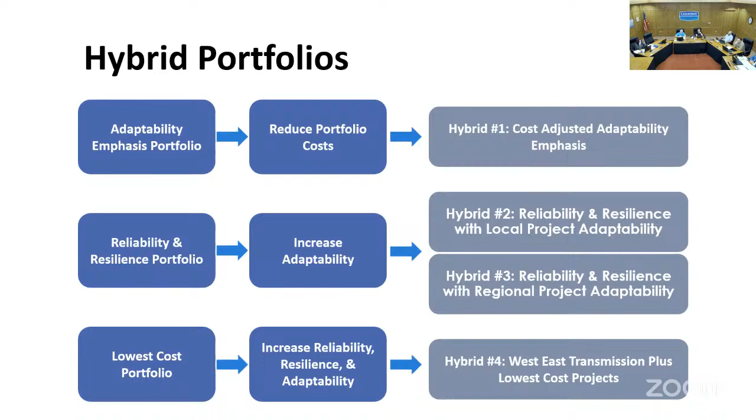So here you can see what projects are included. Once again, there's a lot of overlap in the projects among the 4 hybrids, but they are not exactly the same.

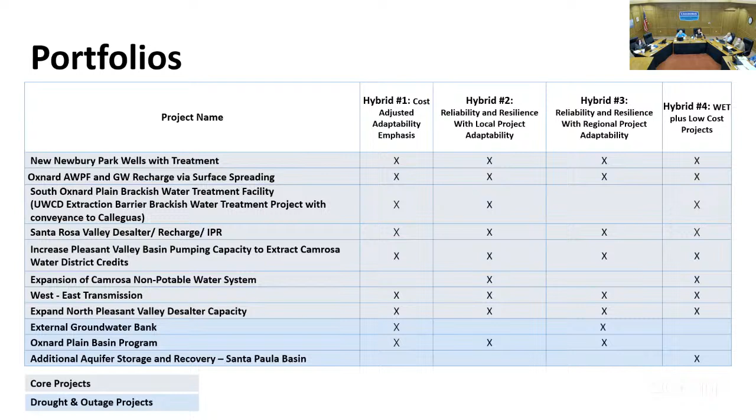So what are the recommendations out of this process? We have a draft preferred portfolio comprised of 6 projects common to all the hybrid portfolios: an expansion of the Oxnard AWPF, a desalter somewhere in the northern reach of the Calleguas Creek watershed with location TBD, a Santa Rosa Valley desalter, west to east transmission as the critical water movement infrastructure component, potentially groundwater wells in Newbury Park or elsewhere in Thousand Oaks, and a project Camrosa has interest in that would increase their pumping capacity.

And then there are some other top performing projects to include: ASR in the Santa Paula Basin, the Oxnard Plain program, which involves different sources of water stored in the Oxnard Plain and extracted when needed, a variation on United's EBB Water project that provides potable water, an external groundwater bank which would be an out-of-service-area groundwater storage project, and a potential expansion of Camrosa's non-potable water system.

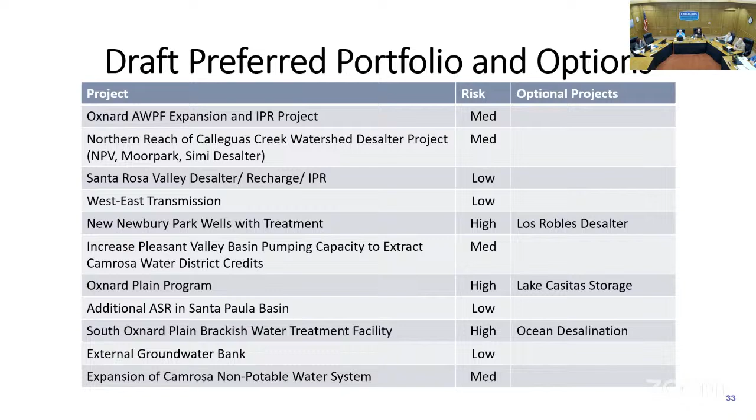One of the deliverables from this effort is no regret actions - things that make sense to do regardless of what the future holds. Starting with supply reliability improvements, it's to advance development of the highest scoring local supply projects, as well as evaluate external storage. Then for local resilience improvements, focus on local storage projects.

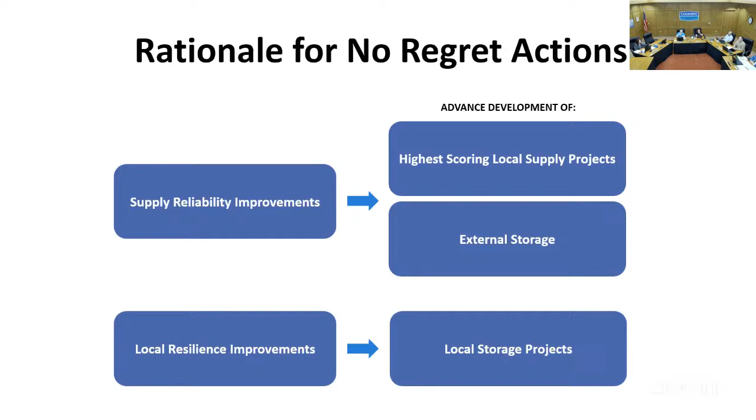Taking that to the next level of detail, we've divided that into three categories. One is project and partnership development, which for a project like the Oxnard AWPF expansion would involve working with a lot of other agencies - working with Oxnard, the Fox Canyon GMA, United, and others - and that takes some effort to make those arrangements work.

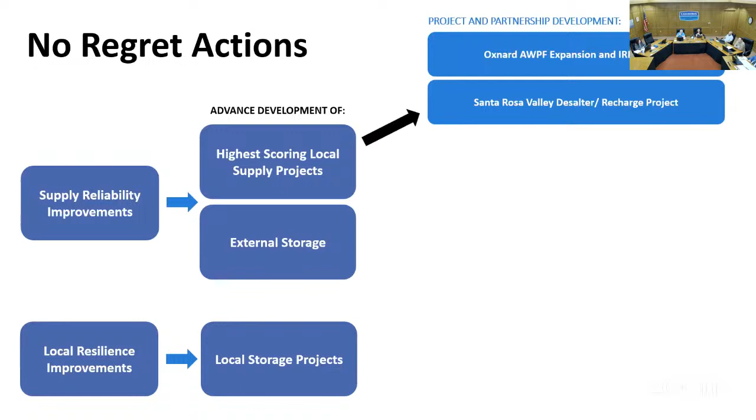Santa Rosa Valley Desalter and Recharge Project - this is one that Camrosa is interested in pursuing, with fewer partners, a little more straightforward. The last one in this category is to develop a wheeling and exchange framework with retail partner agencies. This is something Camrosa originally brought to us, but I think there are other opportunities with some of our other retail partners as well.

What Calleguas can offer is that we have an extensive distribution system and we also have demand - sometimes more, sometimes less. But for some of these retailers, if they want to pursue these projects, their supply might be consistent, but their demand isn't always consistent. So if we can work out contractual arrangements that allow that water to be wheeled through our system physically, or through some sort of exchange agreement, particularly with a time delay component - maybe they're providing water into our system consistently at a certain volume, but their demands aren't that high all year round, so can we balance that out in our system? This is, I think, a really critical piece of the puzzle in making some of these creative arrangements work.

For planning studies, I made reference to the location TBD of the desalter project. What really became clear during this process is there's been a lot of discussion of varying desalters. There's the CB Valley desalter, which the city did explore to a certain point and then put aside. Ventura County Waterworks explored the Moorpark desalter and then ultimately set that aside.

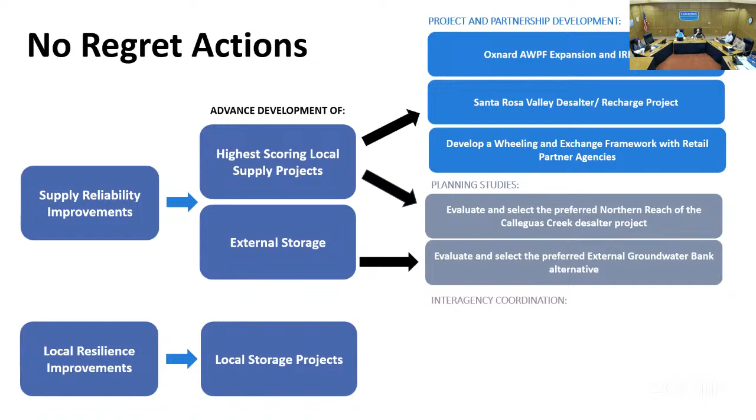Yes, it would be. And then focusing in on interagency coordination - this is absolutely critical to making a lot of these projects work, is to work with the FCGMA and other interested parties, and there are many, to develop a banking framework within the Oxnard Plain. We need to have certainty that when you put water in the ground, you are going to be able to pull it out.

And then for the Santa Paula ASR, that basin has that framework. It exists, but we haven't been a player, partner, or participant in that area. One thing to clarify: the Santa Paula basin, while it is in Santa Paula, is also in the easternmost portion of the city of Ventura, where the interconnection will connect. So geographically, that basin provides a potential opportunity for us for storage. But we need to work with the parties who are part of the technical advisory committee that governs the Santa Paula Basin to see if there's an arrangement we can reach that meets everyone's needs.

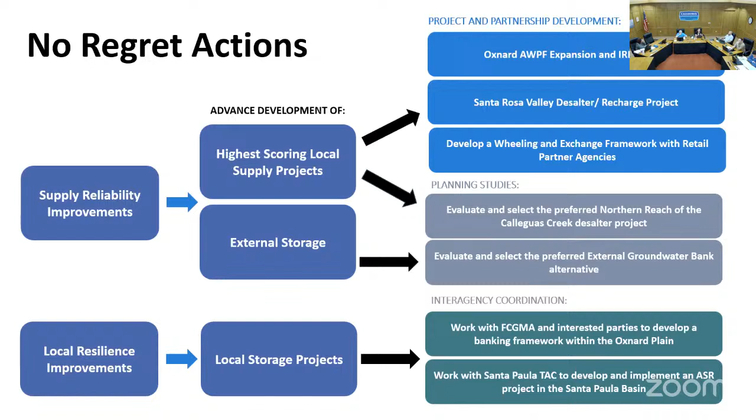And in terms of adaptive management, we know that the one thing that's certain is uncertainty. So the recommendations today are based on what we know today. As we learn more, as situations develop, we will need to revisit and adapt.

The no-regret actions are really just that—things that are going to make sense no matter what happens moving forward. But for the other projects, there will be a continuous feedback loop to come back and say, okay, this project made sense based on what we knew in 2024. Now we know other things, whether DCP is moving forward or not, reliability is changing faster than we thought, the adjudication's still going on 15 years from now. Whatever the case may be, we need to adapt and adjust our timing of the projects, and also swap into optional projects if the preferred ones prove fatally flawed and we can't move forward with them.

So in terms of next steps, we're going to be wrapping up the phase 1 risk report in the last remaining months of 2024. And then we're going to move forward with the actions I've highlighted today, working with partners, further developing projects, working on the desalter study, the wheeling and exchange framework, and the adjudication and groundwater banking framework. So there's a lot—we've made a lot of progress. This is a pretty important and exciting place to be, but there's still a lot of work to go and a lot more to learn.

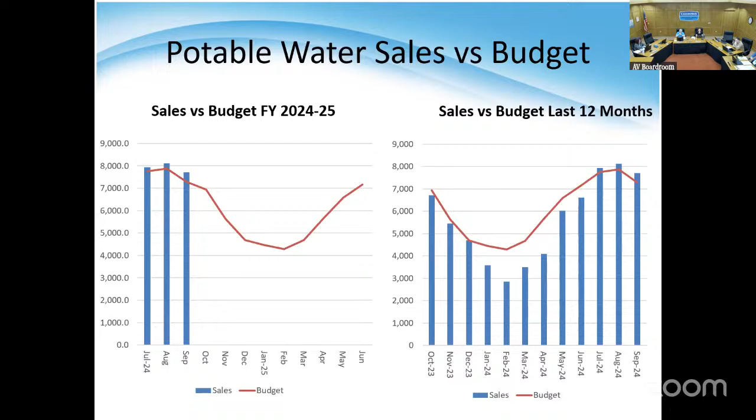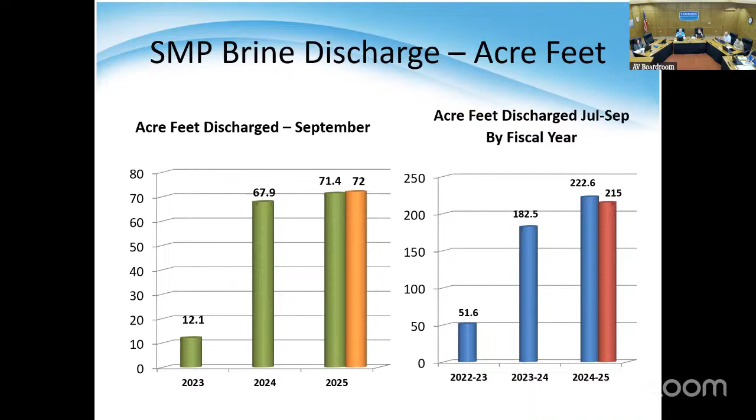SMP brine discharge - historically I've never seen it above budget, so this is pretty remarkable. The month to month, September to what was budgeted, is almost identical, as close as I've ever seen it. That's kind of fun, as fun as finance can be.